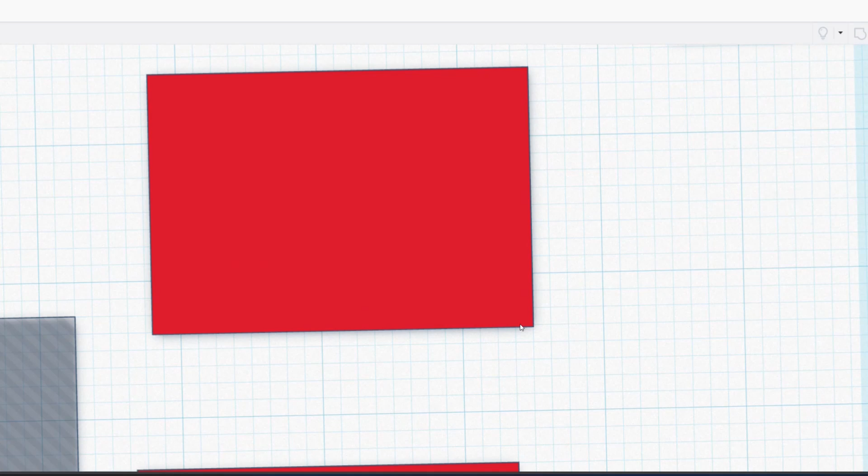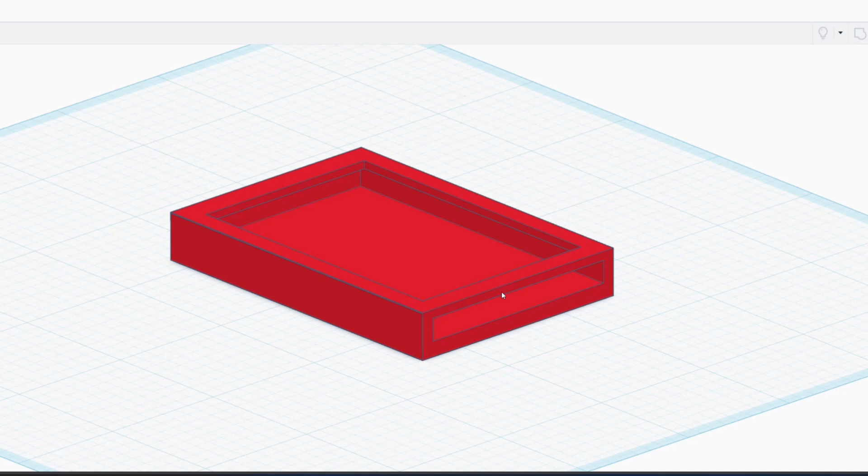We use rectangles. So I took some measurements and hopped in my design software and created a rectangle that was a little bit bigger than the card itself. Then I used a series of additional rectangles to merge all into one and create cuts in the base rectangle. Those rectangles designated as holes will cut out. I had a very short rectangle placed on top of everything so there would still be a lip to hold everything in.

So I printed it out. I gave it a white background so you could see it in all its glory. And then when you put the card in, you got a little display mount.

My initial idea was to mount these to the wall, but if I put a hole and a nail in the back of this thing, even with the card in there, you'd see the nail. And I didn't like the look of that.

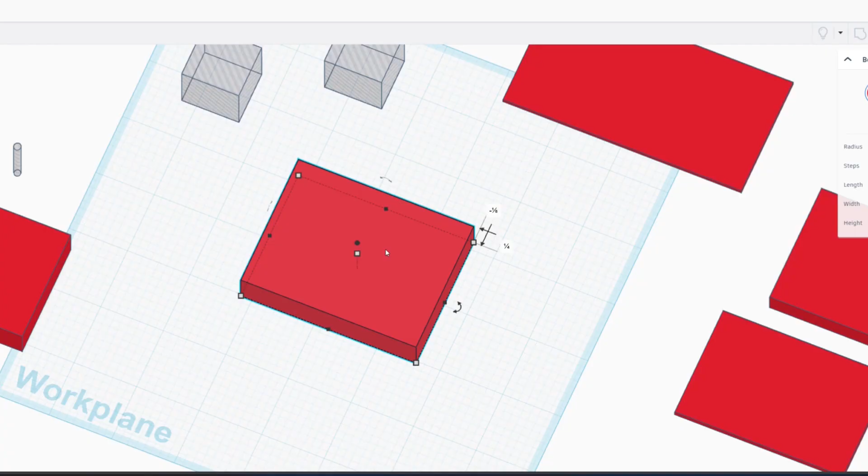So I hopped back in my design software and, wouldn't you believe it, I made another rectangle. I took the dimensions off the first rectangle, which became the frame for the card, and started adding more rectangles back in. Many of them became holes, so similar cuts could be made just like with this piece - cutting out hunks of material from the middle where you simply don't need all that extra stuff. It's fine to be missing material there, saves on cost. I added some cylindrical holes that could act as pass-throughs for the nails and merged it all together. And you've got another rectangle, my friend. This project really made me start to like rectangles.

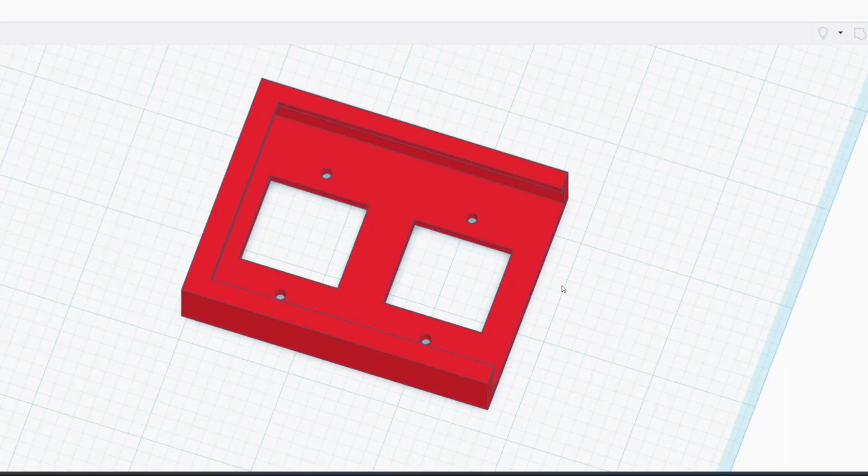Similarly, this thing has a lip so the frame is held in securely. And then we put two on top of each other and merge them together, and bam, we've got a way to mount two vertically on top of each other, and then we print that out. Now we can take these cards and slot them in, slot in a second one right on top, nail it to the wall, and we're done.

But there was a problem. See, the perfect place I determined to place these was mounted to the wall next to a shadow box that I have some Iron Man figures in and some other Marvel stuff on top. And that shadow box is black. So these things, while they looked great, pretty much exactly how I imagined them, they kind of stuck out, and the whole ensemble just looked really washed out.

How do you take something new and match it to something existing that's black? Yeah, you make the new thing black. Luckily, there's no redesign involved, so we just take this, get rid of it, print a second one in black, and we're good to go. So now we can take the card and slot it in.

It's still not quite right, is it? You still have all this white facing you as you look straight on at it. You need the white background so the card shows, but that white frame just really distracts from it.

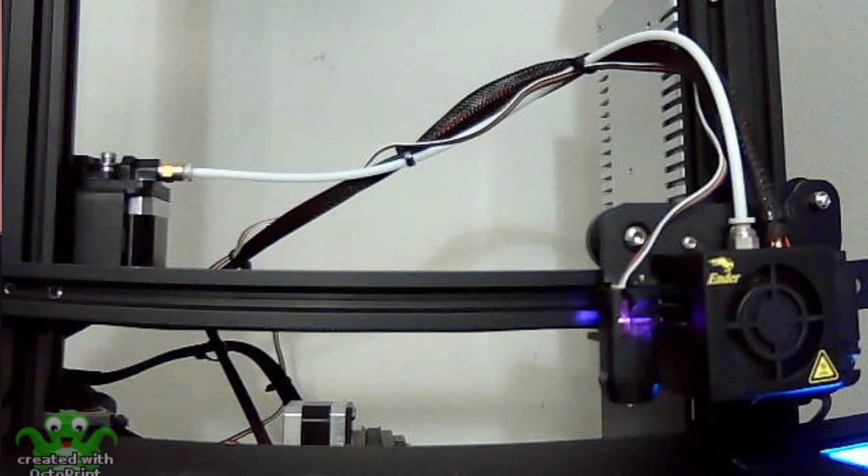This is where we use our best friend, the color change. I used a color change in the last video where I printed the trophy for the Fantasy Football League, where I had to change from navy blue to maize yellow. All we have to do is program that color change into the software. We reprint it, white at first, have it change over to black just at the right moment so the part you look at on the front is black. You still have the white background for the card.

And then we put the villain hologram card inside, and everything looks awesome. If we look at it side by side against the all-white card, it really makes the villain ID hologram card pop. Nail them to the wall, and right next to the shadow box, they look awesome. And given that the shadow box was already sort of a hub for displaying Marvel items, it just makes sense.

And in the end, I ended up with a cool and unique way to display these little trinkets or knickknacks, whatever you want to call them, and keep them out and visible so they stay out of the drawer and can be seen and enjoyed forevermore. I really enjoyed being able to come up with that solution and truly display something like this. It's something I've never been able to do before, and it's the power of 3D printing that got me there.